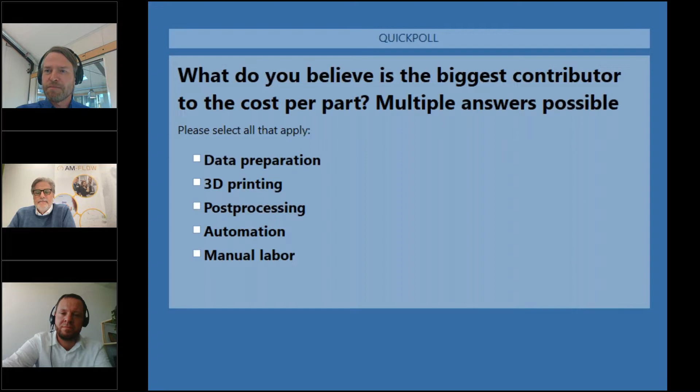So the question, what do you believe is the biggest contributor to the cost per part? Multiple answers possible. And of course, a majority answered 60% manual labor, 20% data preparation, 20% 3D printing, and 60% post-processing. So that's the first of the polls.

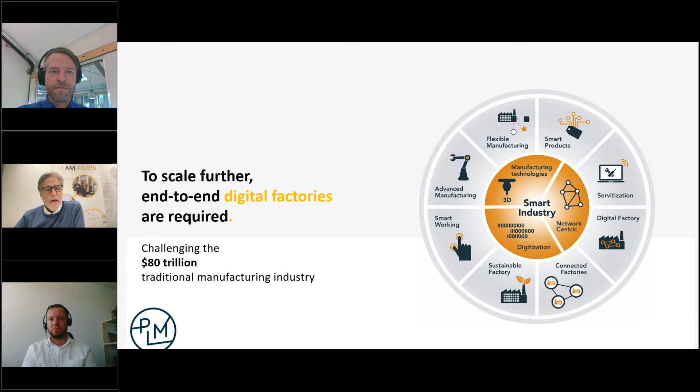Gross margin in the production site was going up. Great result. Until year 10, when suddenly we saw that the gross margin of production was going down. The costs were increasing. And when we did our analysis, we found out that the key contributor to this process is actual manual labor. We could get our machines running almost 24/7. We could renegotiate all the material costs, but we could not renegotiate all the labor costs. Actually, adding a printer up front meant that we had to recruit 2 or 3 people at the back end.

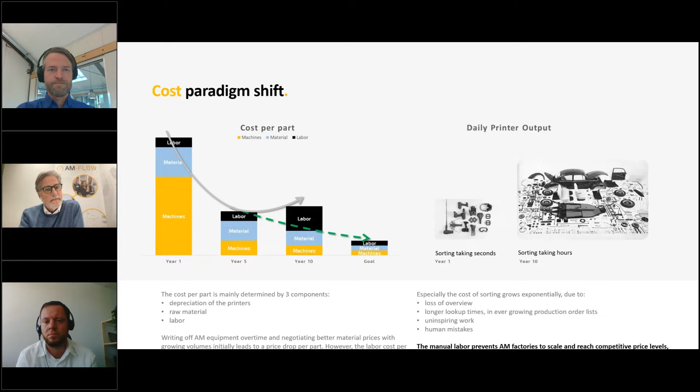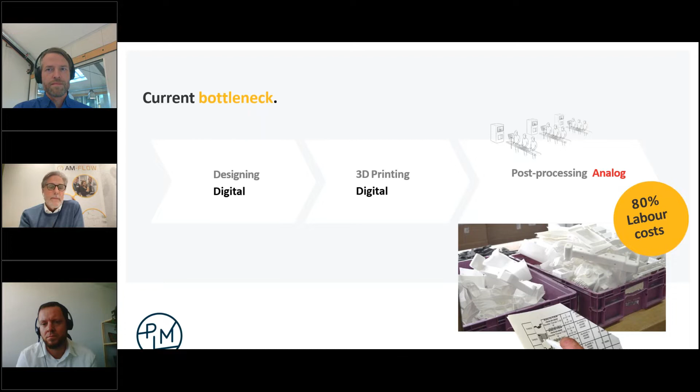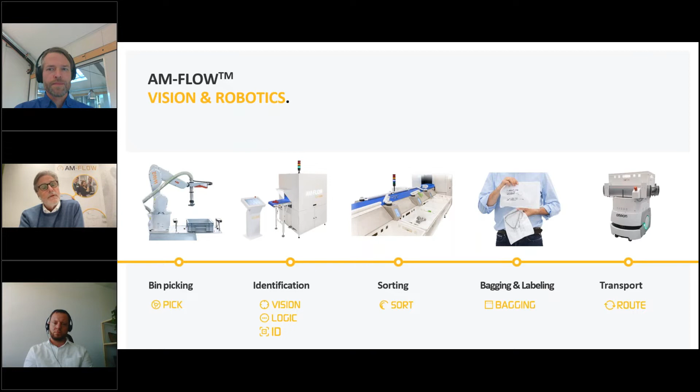So we have got this suite of solutions that will enable it. I'm not going to address our product portfolio at the moment, because I think it's much more important that our listeners here in the webinar understand that what we're addressing is one of the key KPIs of additive manufacturing, which is cost per part. And of course, to grow the market, apart from cost, it's lead times and finally also quality. And that's where also companies like DyeMansion come in, where they are continuously improving the output of 3D production. But we have this full suite of solutions that will help you build up what we want to call an automated end-to-end digital production line. Next slide, please.

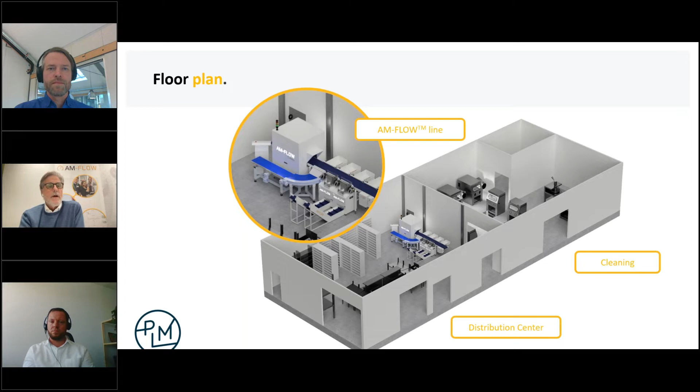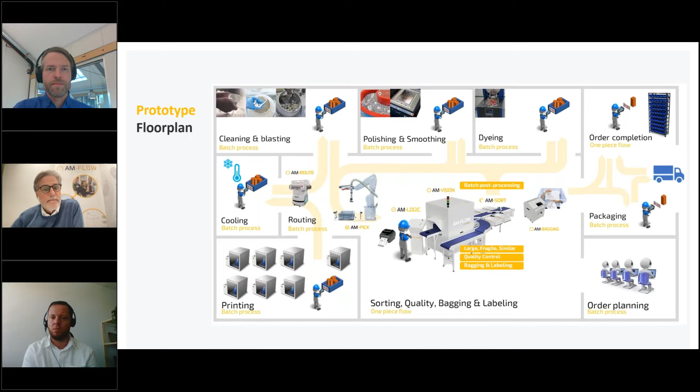And we've been very fortunate. In 2020, we were the winners of the Startup Challenge in Formnext, which was a fully digital environment. And this year, we got the Innovation Award from the Customer Choice, so the listeners of a webinar, a full day around additive manufacturing, and we received the Innovation Prize. This was extremely important for us. We listen to the customer. It's the market that's calling us and saying, we need this. We've got a pain in the market.

And we've added here a quote of one of our very early customers, which is basically, it's a reduction in throughput time, leads to cost savings, reduced identification time, reduced failure costs, etc. And that's exactly the aim that we have, ultimately bring down costs. Thank you very much for that one.

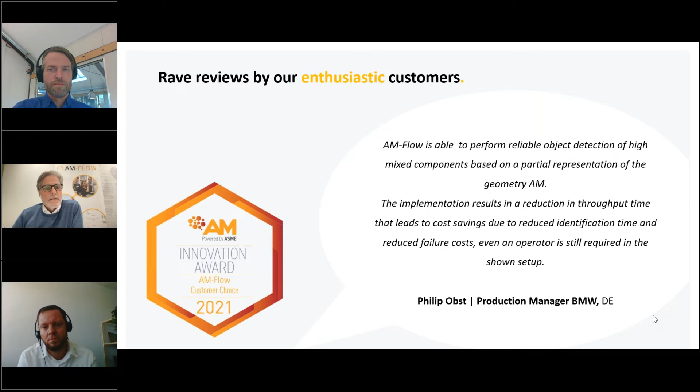And I think the next slide is about how we connect. So we connect all our data with your existing software environment, your MES or ERP system. We have a full API connector for that, and we pull out specific data points, or actually you push those data about the batch, the STL file of a particular design, and the process steps necessary to deal with that particular part. So that is a fully digital environment. Next slide.

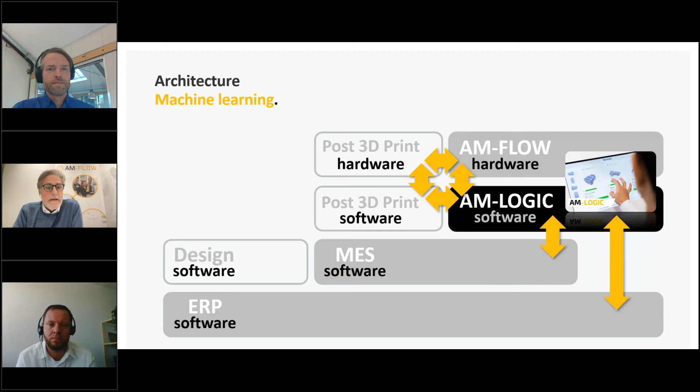Right. Sorry, Matthias, go ahead, take it away. Yeah, no worries, Carlos. Let me just bring up the next poll question here. So the question is, do you have a colored high volume / high mix production? And let's make sure you all can vote. It's a simple yes or no, and let's see, collecting responses.

Still in progress. Someone is either away from keyboard or too shy to answer. I think we can pause. Oh, wait, that was another one. Let's see. There.

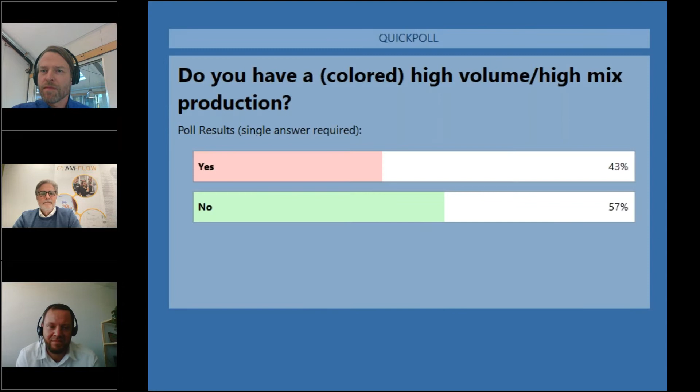So yes and no answer. 43% said yes, and 57% answered no. Let's see if I can share that result. Bear with me here. Yeah, it's all visible. And then I'll go back.

So let's move on. We have some ground to cover here. We're going into the next section of this walkthrough. And it's time for Greg Gratzky first and foremost, but then Carlos Vicker will join this walkthrough of examples of automation solutions for the post-processing of 3D printed parts. Greg, welcome, and take it away. I will control the slide deck. You just let me know.

All right, thank you very much, Matthias, for this very nice introduction, and thank you very much, Carlos, for introducing us to the challenges of post-processing. So I've been representing the DyeMansion company since 2015. We are responsible for turning your raw parts into high-value products in an automatic, scalable, and repeatable way, which are very important factors for manufacturing, in terms of 3D printing here.

So one of the most important things that you mentioned, Carlos, is that when we are scaling our production, it's not the cost of the material which is growing, it's not the cost of the machine which is growing, it's the cost of labor. And so it shows us really that labor is not scalable. So the more machines we add, the more manual jobs we have to deal with. And it's an absolutely important factor that we should really pay a lot of attention to

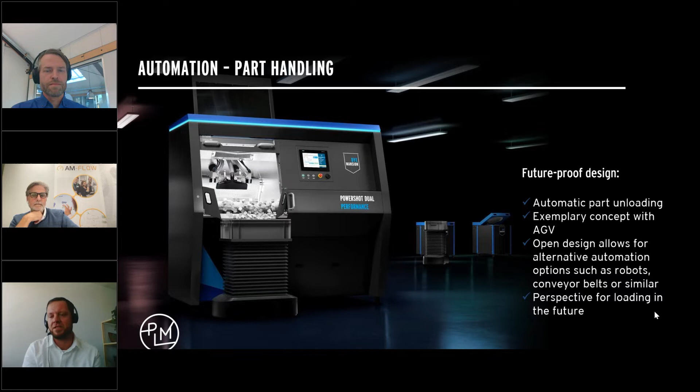That's why we came up with a solution called the Performance Series, that can be fully connected to a cloud, gives us constant feedback about the current statuses, and is more plannable. So we can think of the possibilities and about the different geometries. And if we go to the next slide, this machine has a much wider cleaning platform based on the conveyor belt, where in one run we can make around 500 pieces of eyewear or 30 shoe soles. Which gives us a certain production volume at this moment. And the whole process of cleaning takes around 15 minutes.

Without taking the parts out of the machine, we can basically start the mechanical smoothing process. So the machine first shoots the parts with small plastic media, and then after cleaning the remaining powder residue, it automatically switches to a bigger plastic media and helps us smooth the parts automatically.

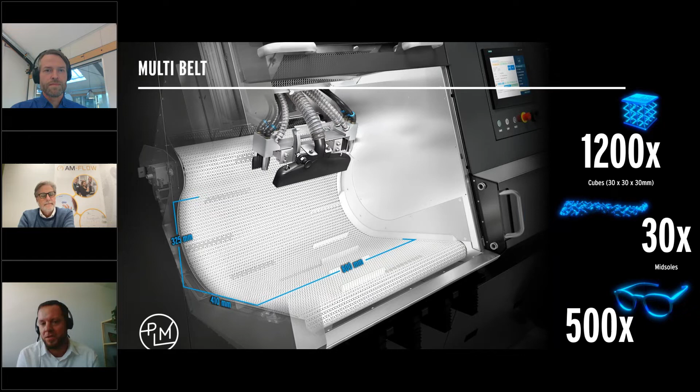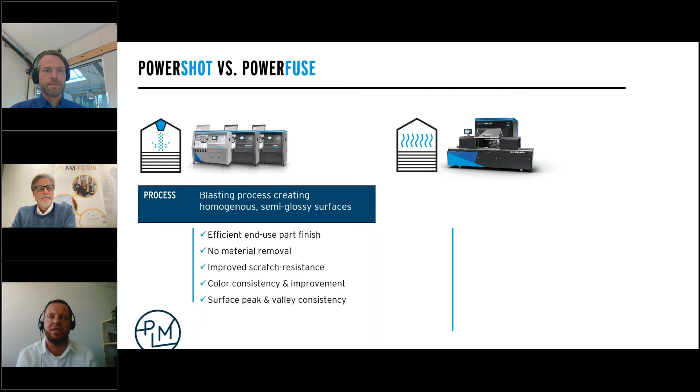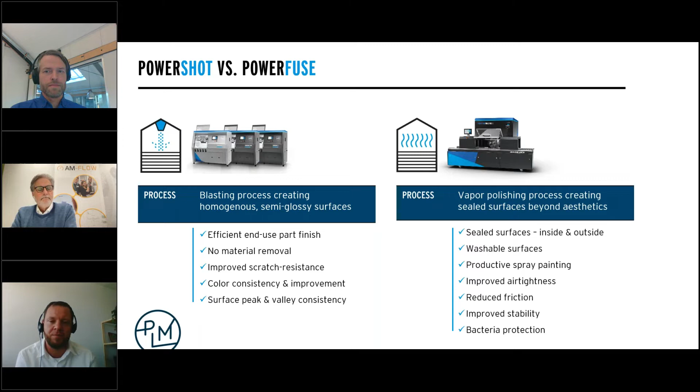we have the vapor polishing system, and this machine is also fully automatic. It gives us very important feedback about the current statuses and the current process. It allows us to get notifications on our mobile phones or on the computer, saying this machine is currently running a process with this number. An important factor is that this process is fully customizable, so we can assign particular baskets to different finishing levels.

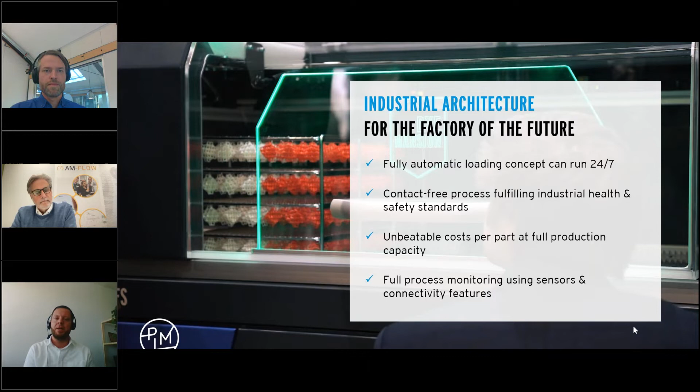And here we are not talking about batches anymore. We are talking about parts which will have a particular surface finish. So here we require a certain distribution which can be delivered by AM Flow, where one batch will be smoothed in a very strong mode and another in a very delicate way. So we can go to the next slide. This is exactly what I'm talking about.

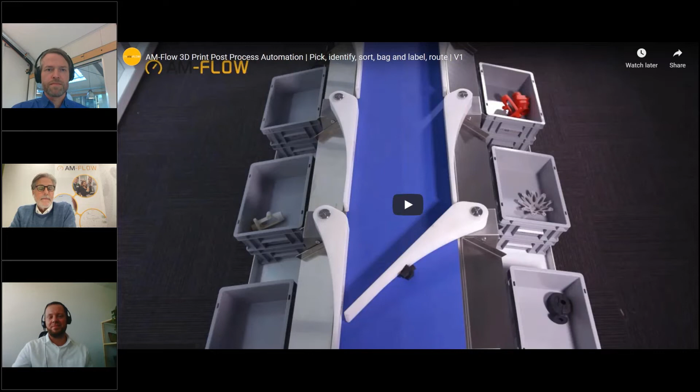Exactly. So what you've seen here is that once we've identified a part, no matter which stage that part is in, we can redistribute or reroute it into the next stage, to whatever is necessary according to the bill of material of each individual 3D printed part. And because you can do that, you can automate it. You cannot see it here, but in the previous slide,

what you saw there was the point in which a cobot has the bin on top of it in which we sort parts, and that cobot can then run to the next department fully independently as internal transport, and at the department you can then hand scan a QR code on the carrier.

That's very important. All the parts go into the next batch process, which might be blasting or whatever, at various levels. And when you're ready with that, that same carrier with the treated parts comes back to the AM Flow and then gets redistributed into the next specific step in the overall post-processing flow for each individual part, or ultimately they can be bagged and labeled and made ready for shipping.

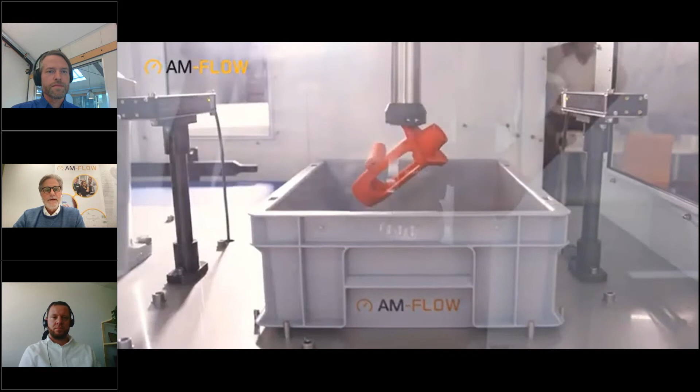So here you see a bin with various parts. This is our picking robot that can pick up the parts and place them on the conveyor belt. And it doesn't matter which size, format, or form. Irrespective of the way parts are lying on that conveyor belt, they are photographed and identified. And you see those photographs and the identification on the operating console.

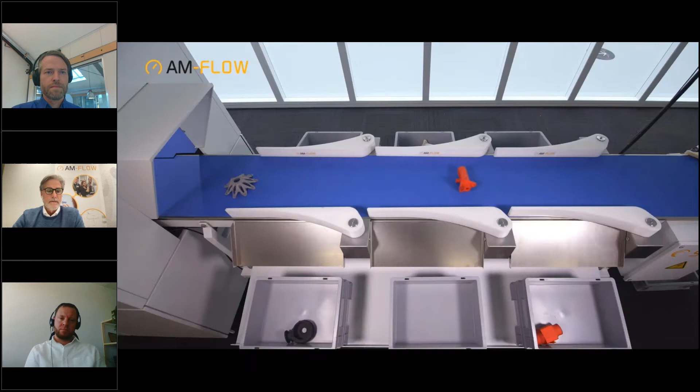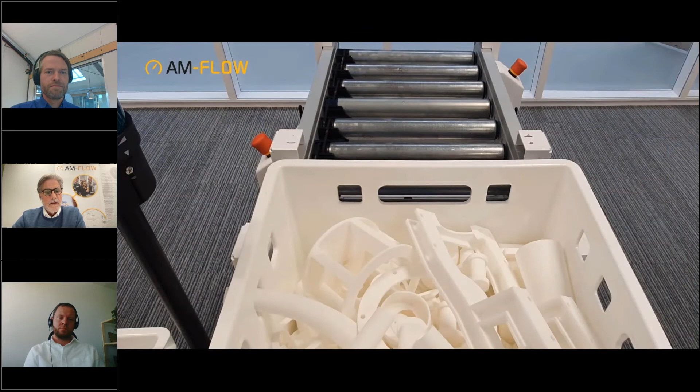The sorter then sorts all the individual parts into the appropriate bins. And the other option is, if something needs to go out to shipping immediately, like for instance, this pair of glasses, they get bagged with a label on it and everybody knows what needs to be done with that particular part.

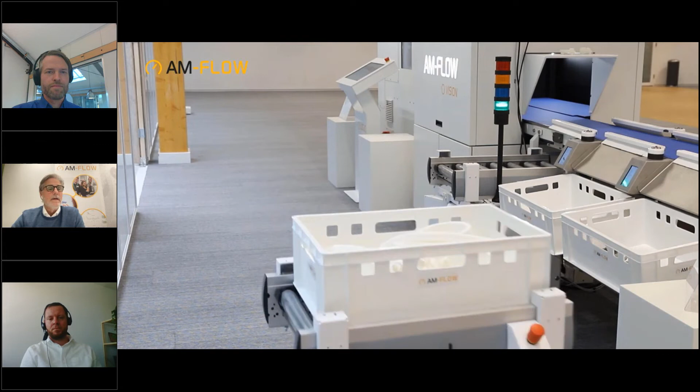And in this part, you see here the aforementioned cobot that will pick up a bin and ride this specific bin into another docking station somewhere in another department, whatever that may be. And as you can see, it's riding around in our showroom in Eindhoven, where we filmed this video.

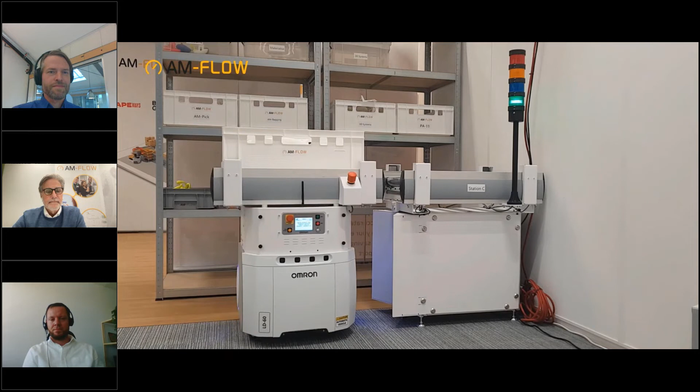And a full-blown version of this will also be presented during Formnext next month. So we'll have all these modules up and running, showcasing how that looks in real life, basically rebuilding an end-to-end digital production line.

One of the centerpieces of this is the AM Logic, which is our proprietary AI software. We have an API connector. What happens in the computer vision and identification part is geometry-based object identification, which is a machine learning entity that actually gets better the more you use it. Because we can identify any part, we can track and trace them wherever they are in the factory. So you no longer lose parts.

We will also feed all that data back to your ERP. So even if you get audited and they ask you where this particular part is in your factory, you can immediately say, I know where it is. So this is an important way of actually collecting data around your production process.

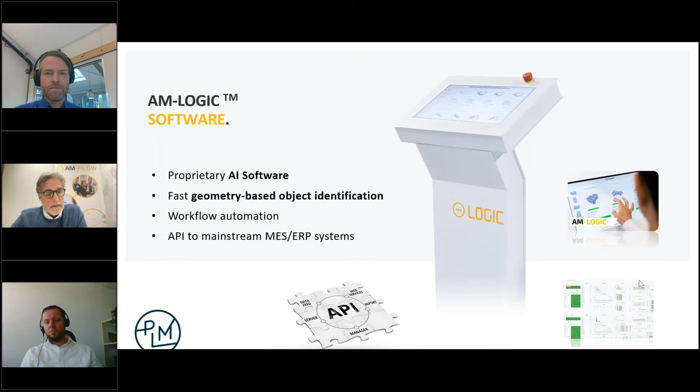And ultimately, we also believe that this will contribute to certifying your production process, because that is going to be another requirement in due course, that we actually certify and understand how a part is being made and what steps it has gone through to make that particular part. Next slide.

Over to you, Greg. Yeah, so we are coming back to the VaporFuse Surfacing. What we already went through is that we went from a bag of white powder filled with the parts, and we were able to depowder it, and we were able to smooth it out mechanically. We were able to recognize the geometry and deliver these parts to different surfacing levels.

It's very important for us to pay special attention to the PowerFuse, because this machine was also developed to meet industrial standards. In a factory or industry, we should have no more space for experiments or for dangerous substances. So this machine can be placed on a shop floor. It is always connected to the cloud and gives us constant feedback.

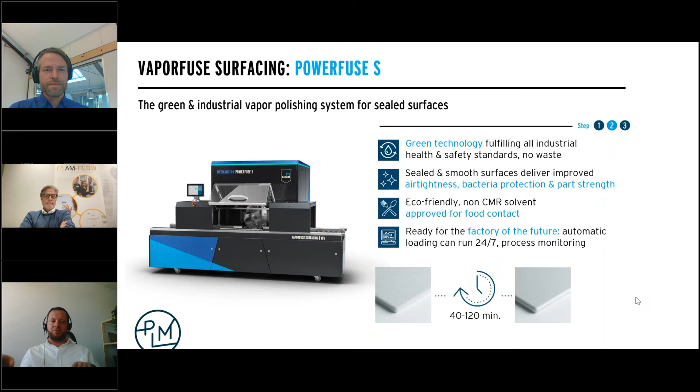It also does not require any special site preparation. You don't need any special air conditioning or safety features. You can immediately run this machine inside your factory. So once we have our geometry recognized, once we have the parts distributed among different baskets with different smoothing levels, we can perform smoothing and still keep them divided into different baskets. We can send them to further processing stations, for example, coloring.

I'm sorry about the PowerPoint here. There's obviously some sort of glitch or bug. Let's see if we can work it out. No. That was it, almost. Yeah. There you go. That's it.

pick up with your finger, because it's a touch screen that you have on the operator console, and place whatever the next step is or the requirement into a particular bin. So if you want parts that need to be polished, or parts that need to be colored green, or parts that need to be colored blue, you can actually dynamically switch in any way and spread it across all the bins that you have available.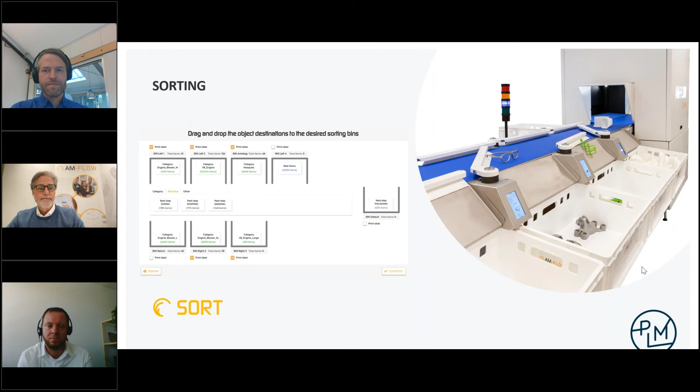Yeah, indeed. And the next step can be, for example, coloring. So color plays a very, very important, or even the most important factor in creating the final parts. So what is important for a DM60 is that it does not require almost any human power. You just load the machine, scan the cartridge, that can be also distributed to particular baskets which were assigned by AM-Flow, and basically you start the machine as it is.

Yeah, the machine is fully traceable, the process is recorded. So if, for example, a part will not behave as it should, you can come back to the machine, check the log, and you can see if there was, for example, a temperature drop during the process. So you can easily get rid of future possible mistakes.

Parts are finished after approximately 2.5 hours, and they are slightly wet, but they are ready to use. So you can easily dry them in standard room conditions, pack them and send them over directly to the customer, or sort them if all parts are, for example, dyed in black, and you just need to distribute them among the different geometries, among the customers. Yeah, next slide, please.

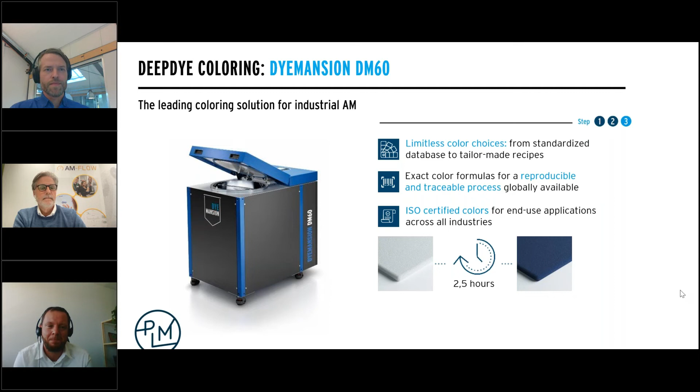Yeah, that's exactly how the process looks. Basically, as I said, we are filling the basket, we are scanning the cartridge. The cartridge has all the important information that you need to operate the DM60. You put the basket back into the machine, press start and leave it for 2.5 hours.

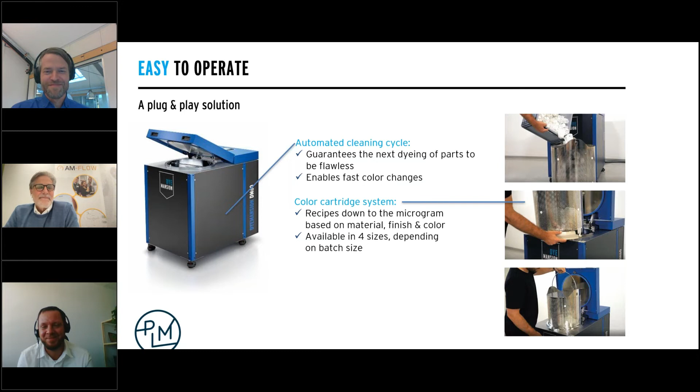And wouldn't it be great, instead of having those hands putting a bin, tipping it over into your system, that we provide you with a robot that actually slides it into your machine, Greg? That would be great. Yeah. Well, I was thinking about packaging these machines in an automatic, nice robotic way. Yeah, and I think we are developing this machine having that in the front of our heads. Absolutely, great fun, good. Next slide then, there you go.

And again, the important thing that we want to reiterate at this point, it's about going from one-piece flow back to batch and then to one-piece flow again, et cetera, several times throughout the overall manufacturing process for each individual part. Now in the poll earlier on, do you have a high volume, high mix kind of environment? Of course, there are going to be a number of people who say, yeah, but I don't have that high mix. It's not going to be an issue for me. Well, potentially you're right, but I just want to throw in some ideas around that.

If we're going to start increasing additive manufacturing production, a lot of people are thinking about serial production. Mass production tends to be serial. And if you look at the economics of a printer, nesting one printer for a serial production gives you a lot of free space to place other parts. And again, it might be that your customer says, yes, but I don't want any other parts printed in there, which just makes that part potentially more expensive. You have virgin powder, you use it once, and then there's a lot of space in the nesting that you do not use, and then you're stuck with secondhand powder.

In the typical high volume, high mix environments like service providers, they make literally almost a Tetris game of fully optimized nesting, the optimal density to produce high quality end products. And that is a way forward if you're going to increase the volumes.

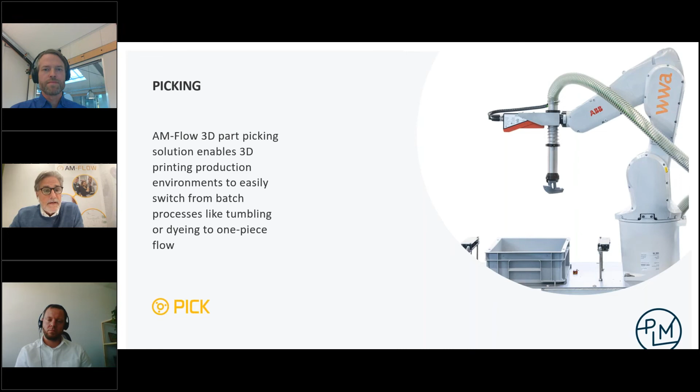Yeah, absolutely. So the automatic post-processing also gives you additional values which are not visible at the very beginning. So when we are thinking about the production, we are thinking about one part that looks good, feels good, has fantastic geometries. But if we are going deeper into that, we need to consider that our parts might require to pass some of the certifications.

Let's take eyewear, for example. It's an application that is very, let's say, suitable for 3D printing from the first perspective. We got customizable eyewear manufacturing, an eyewear factory where you can define your geometry. You have complete freedom of the design. Different colors put you even more into this customization. But as a manufacturer, first of all, you need to consider that your product has to be fully biocompatible.

And if you are a contract manufacturer, your customers might require certain quality management implemented into your factory. And if you have human power and the risk of human error, it's very difficult to achieve this quality certification. So the automation of your post-processing basically helps you a lot in getting more customers. And we are not talking here about one prototype. We are talking about mass production, which generates much higher revenues. Next slide, please.

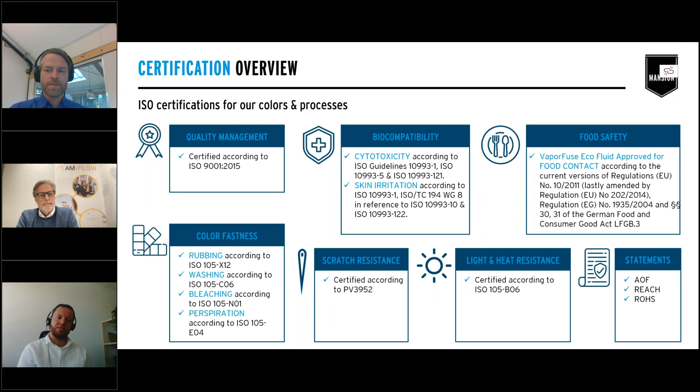So we just want to almost close this session by talking about the benefits. We're doing this, of course, for your business, but ultimately it's going to be also your customer. Now, if we just look at the economics, I raised it already within the context of the high density, high volume, high mix kind of process. This enables you to scale your business, to increase revenues, because you can take on different kinds of orders from different customers. The aim is cost price reduction, and of course, to maximize the capitalization of the assets that you have already, which are your printers basically.

But also by introducing this digital process, you get better workflow efficiency, tracking and tracing, which potentially could lead also to certifiable production processes, automatic data entry, automatic counting. It's a repeatable process. And one of the latest things that we're talking about in terms of safety and all things digital is the industrial digital thread, that you can really follow how a product has been created from the very beginning to the usage, to breakage, and then feed back the information why it might have broken. Finally, lead time minimization, minimizing delivery mistakes, same-day delivery, audited processes, custom bagging and labeling.